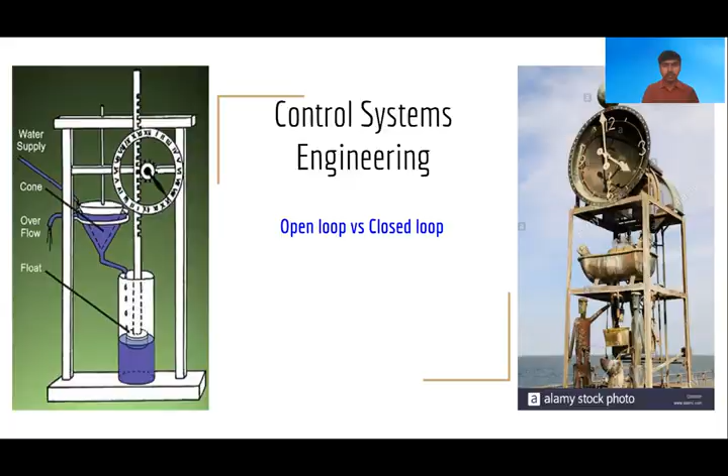In this video, we will learn the open loop and closed loop control systems with examples. Before discussing open loop and closed loop control systems, let us know what is meant by a system and what is meant by control system, and also what is the need of control system.

Now we'll see first what is a system. Generally, the system is a collection of elements or components contained in a sequence to perform a specific task. If the output quantity of the system can be controlled by varying the input quantity, then the system is said to be a control system. Then why is this control action required for the system?

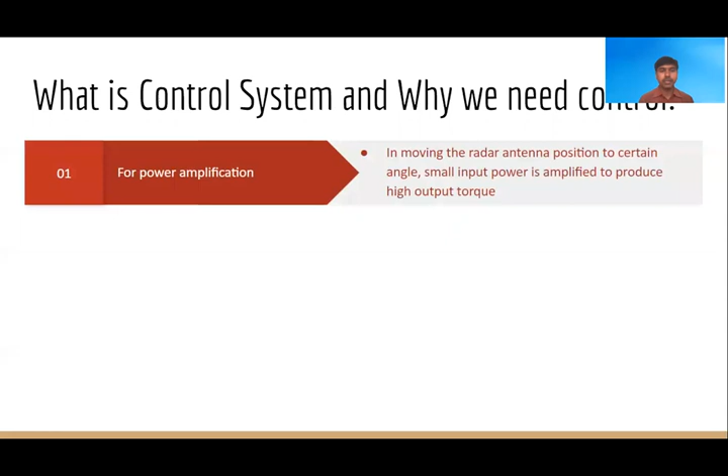Now we'll discuss different areas where control action is required. For power amplification, in some systems like radar antenna, to maintain its position, we need to give the amplified power to produce high torque on the radar to achieve the desired position.

In remote controls, to control the movements of the robot, to work in contaminated areas where human beings are not allowed, we need to control the movements of the robot.

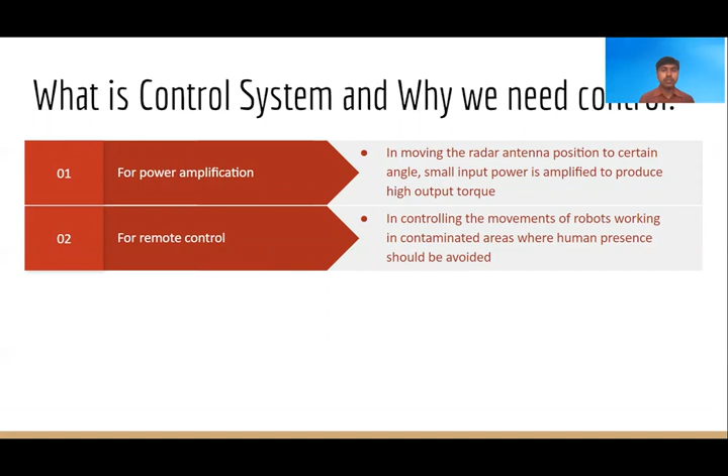Then for convenience of the input form, in the temperature control system, to maintain the desired temperature of the room, we need to control the knob position.

For compensation purpose, when the disturbance occurs in the system, we need to compensate the disturbance to achieve the desired output quantity. For example, in the antenna position, when it is disturbed with high or strong wind, we need to compensate this disturbance by varying the input quantity or some parameters to maintain the desired antenna position.

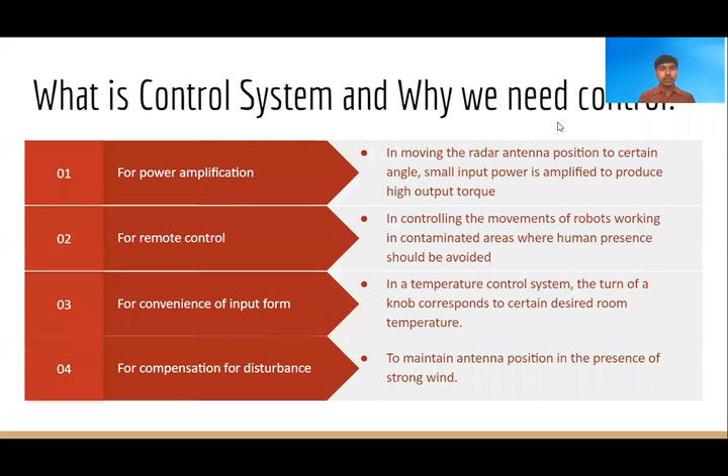Now let us see the open loop control system model. This is the open loop control system model.

Basically, the open loop control system consists of a controller and process plant, where the reference input is given to the controller. Based on the reference input, it gives the control signal to the process, then the process will deliver a controlled output. But here the controller doesn't bother about what the output is delivered by the process. That means irrespective of the output, whether it is our desired output or not, the control system will continuously deliver the same output. This is called the open loop control system.

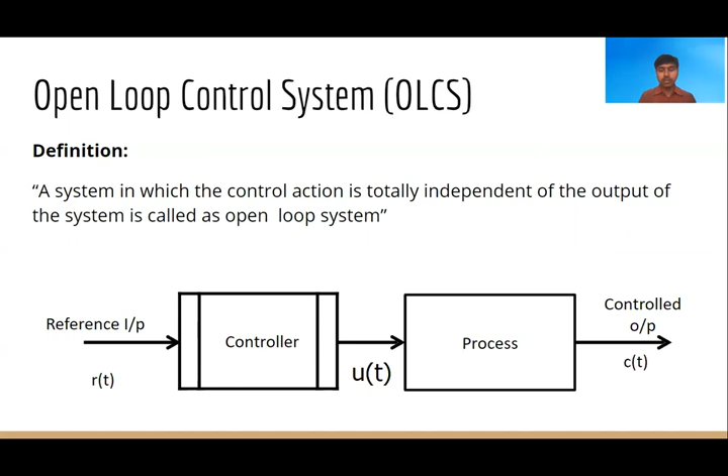Now we'll see some examples of open loop control system. See, what is this example? It's a hand dryer, electric hand dryer.

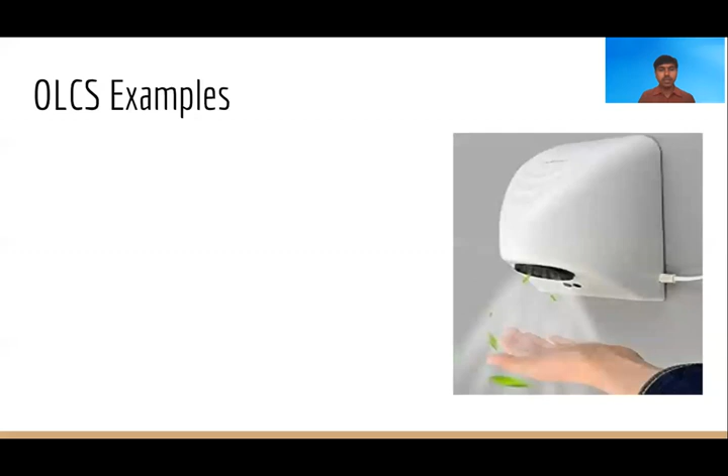When you keep your hand under the hand dryer machine, internally the air will be heated and blown out continuously, and hot air comes out to the hand and hands will be dried. As long as your hand is under the machine, whether your hand is dried or not, the hot air will come out from the dryer machine. That means the system doesn't bother about whether your hand is dried or not. This is an example of open loop control system.

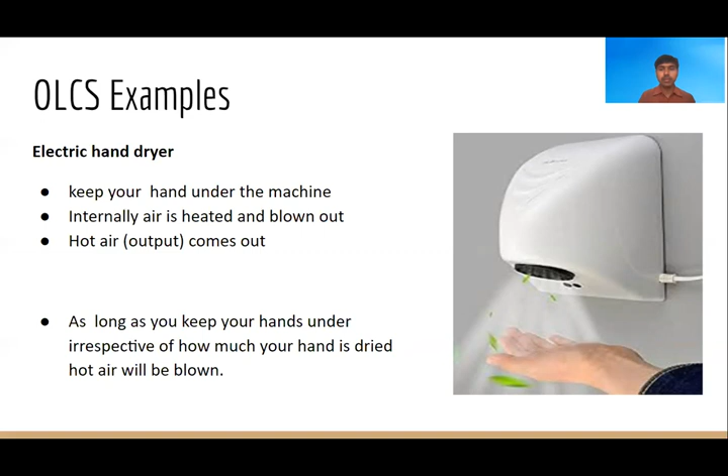The second example is automatic washing machine, where the clothes will be washed based on your time set in the washing machine. When the power is on and the time is set, the motor runs and spins the clothes inside. As long as the timer is running, the wash will be spinned, and after the time is 0, the clothes will come out.

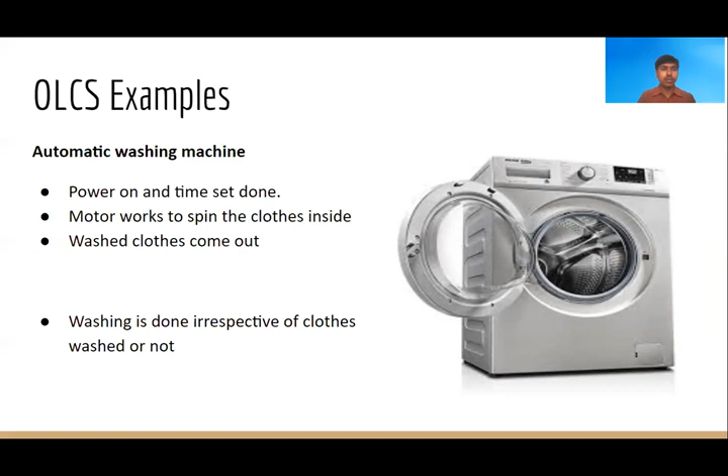Here the washing machine doesn't bother about whether the clothes are washed or not. It depends on the timing value. If we set the time, until that time becomes 0, the clothes will be spinned, and after 0 it will come out. This is another example of open loop control system.

Now see, this is another example of open loop control system. Can you guess what is this example? Yes, this is a traffic light control system where we'll set the timer in the controller for how long the lights will be on.

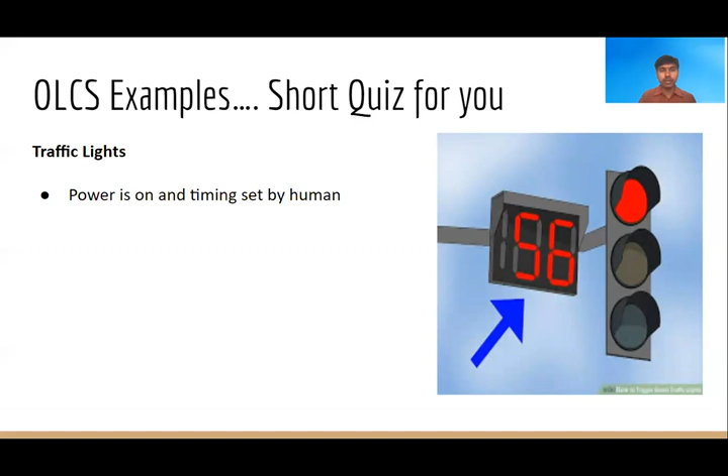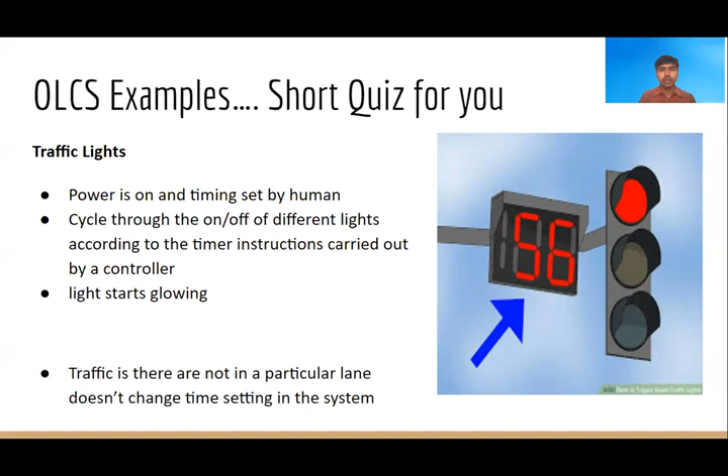When the power is on, based on the time set, the lights will be on, and it doesn't bother about whether the traffic is there or not. This is called the open loop control system.

Now we'll see what are the advantages and disadvantages of open loop control system. These are the advantages of open loop control system. The construction of the open loop system is very simple because there is no feedback, no continuous monitoring of the output variable. It is having a simple transducer, controller, and plant so that we will get a controlled output. It may be a desired output or not - don't bother. Simply the construction is very simple in open loop control system.

Due to less number of components and there being no control action on the output variable, it is economical and also very easy to maintain. This is all due to the absence of feedback, so there is no need to continuously monitor the output variable. Therefore, the maintenance also is very easy. Once the input is given, the controller gives some excitation to the plant that gives some output. So it's very easy to maintain.

The system is generally stable because here the reference input is given to the plant through the controller, giving some output, and this output is not fed back and continuously changing. So the output is always the same, producing a stable output. It is very convenient to use where the output is difficult to measure, and where the output need not be monitored continuously, open loop control system is preferred. Then what are the disadvantages of these systems?

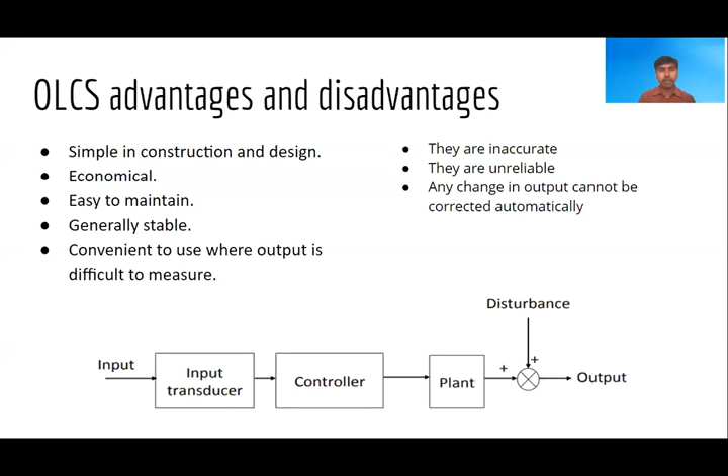To avoid or overcome these problems in the open loop control system, let us know what the closed loop control system is, which overcomes the disadvantages of the open loop system. It doesn't mean that the closed loop system is always better than the open loop system; there are some disadvantages of the closed loop system compared to the open loop system. So these two systems have their own advantages and disadvantages.

But in general, in applications we expect a more accurate output, even under disturbances, so we prefer the closed loop control system.

This is the model of the closed loop control system. In this system, we generally have the transducer at the input section, the controller, the plant, and then the output. This output is fed back through the feedback element, which is again a transducer. Therefore, the controller controls the plant parameters to get our desired output.

Here, when the input is given, the transducer converts the input from physical form to a suitable form for the controller to take action on the plant. The controller, depending on the error signal, generates a control signal to the plant, and the plant produces some output along with the disturbance present at the plant.

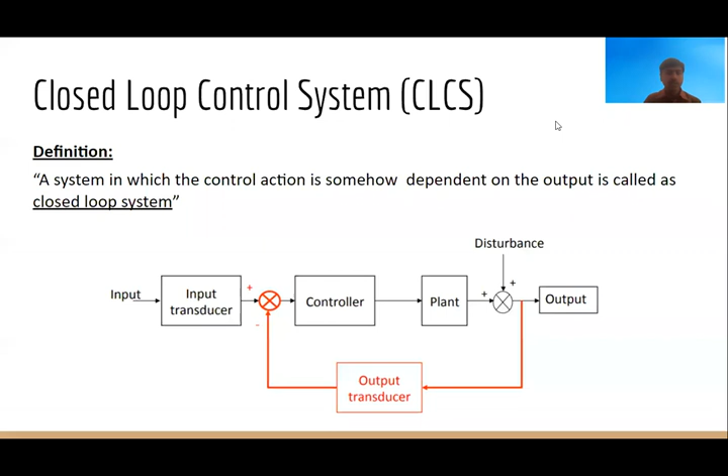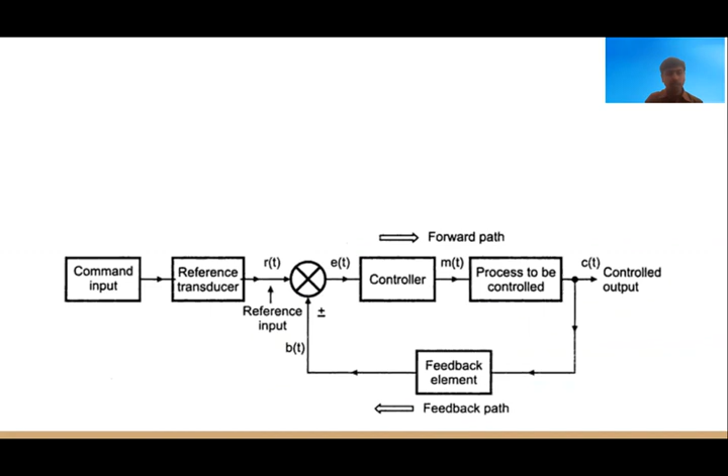This is the general block diagram of the closed loop control system. Now let us see the control signals of each block. Here the reference input is given to the error detector, denoted as R of t. After the error detector, we get the error signal E of t, which is given to the controller. Based on the error signal, the controller generates a manipulated or controlling signal to the process.

There, the process controls the parameters of the plant and delivers the controlled output C of t. This C of t is again fed back through the feedback element; say the feedback signal is B of t, and this is given to the error detector to get the error signal.

Here, the feedback may be positive or negative feedback. If it is negative feedback, the error signal E of t equals R of t minus B of t, and if the feedback is positive, the error signal is R of t plus B of t. Based on this error signal, the controller keeps controlling the parameters of the process and delivers the output until it reaches our desired value.

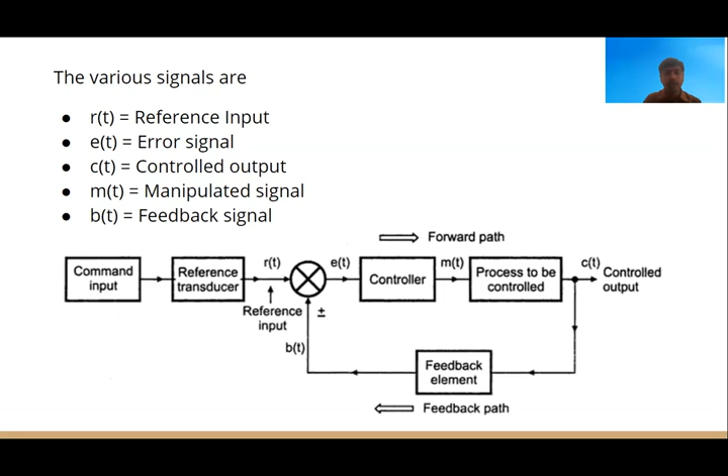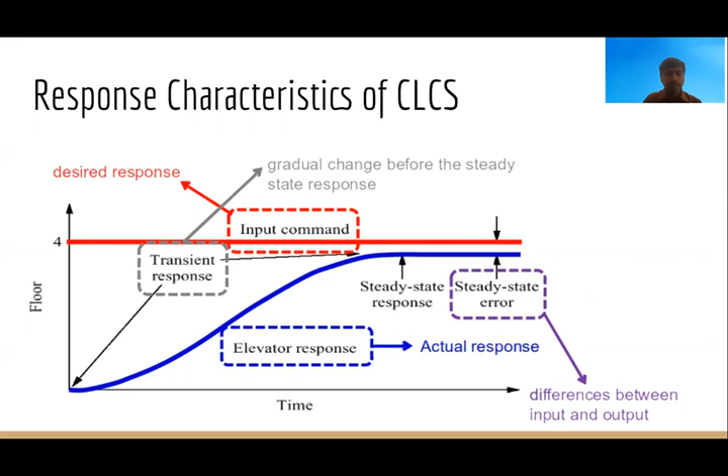In general, the dynamic response of the second order system is given like this. The output variable fluctuates till some point called the transient period. After that, it will reach and stay at some limit close to the desired value. That period is called the steady state period.

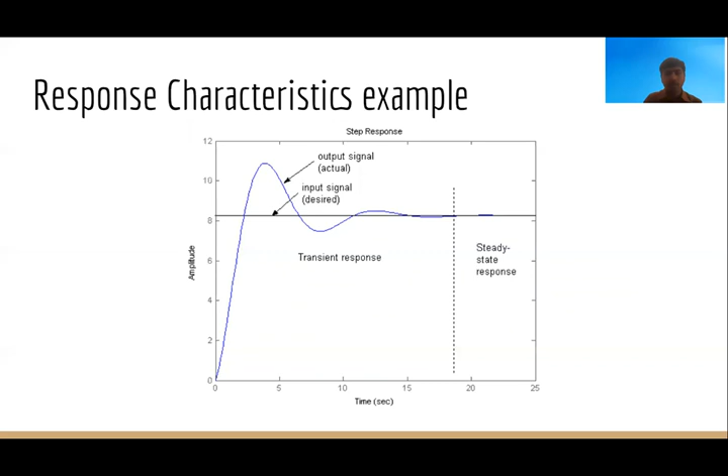Now we'll see some examples of closed loop control system. The first one is the student and teacher learning process.

In this process, the lecture content is given to the students before starting the lecture, and the teacher teaches the lesson. The student listens to the lesson and grasps the content. Finally, after completing the course, he will get a degree and placement. But the quality of the degree and getting placement depends on the performance of the student.

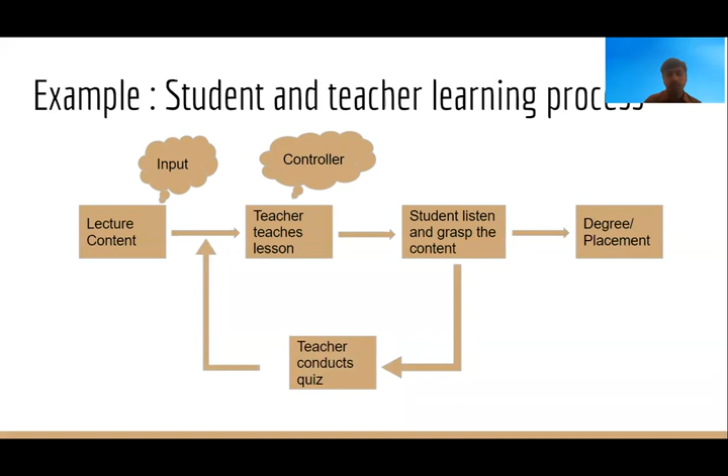The performance of the student is periodically monitored by the teacher by conducting quizzes. Here, the lecture content is the input, and the teacher is the controller who controls the teaching methodology to make sure the student's performance improves. The student listening, grasping the content, and improving performance is the process. Getting the degree or placement is the output, and the teacher conducting quizzes is the feedback based on the expected level of marks and placement.

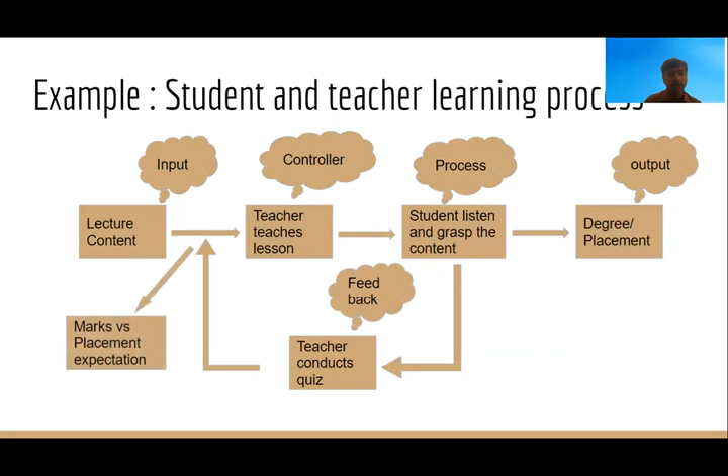In the second example, I will show two images. Please identify and compare them. On the left side we have the old iron box, and on the right side we have the new iron box. In the old iron box, we have to manually adjust the coal to get our desired temperature, and also manually check whether the clothes are dried or not.

In the new iron box, we have to manually adjust the knob to our desired temperature point, but there's no need to check whether the clothes are dried or not. Automatically, the sensor senses the temperature and switches off whenever the temperature exceeds the limit.

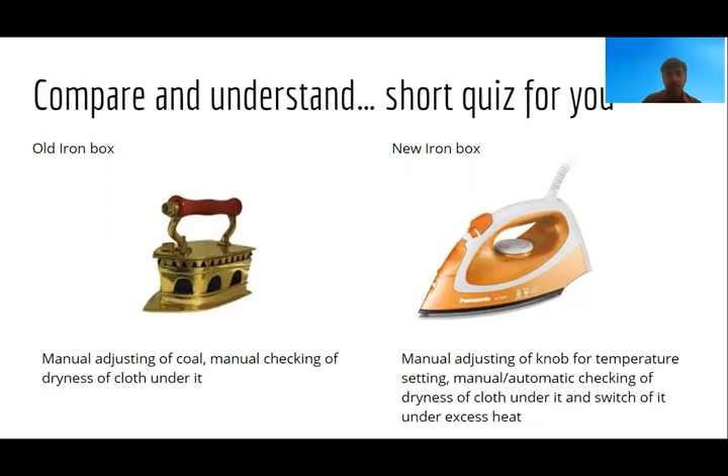Now we'll see the next example of closed loop control system, that is stability control of a quadcopter. First let's see this video, then I will explain how it is controlled.

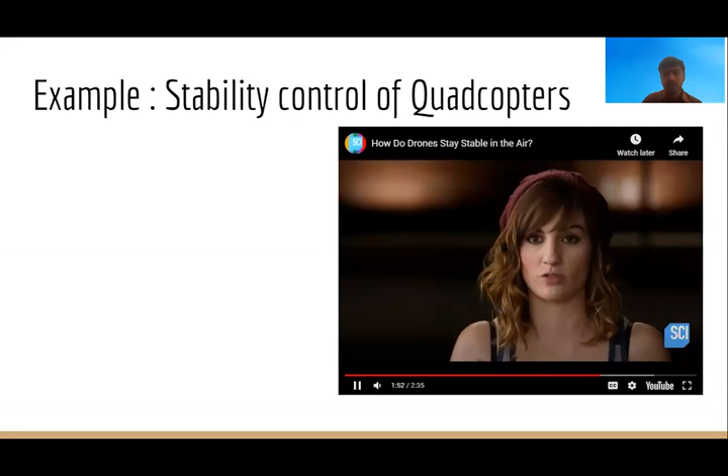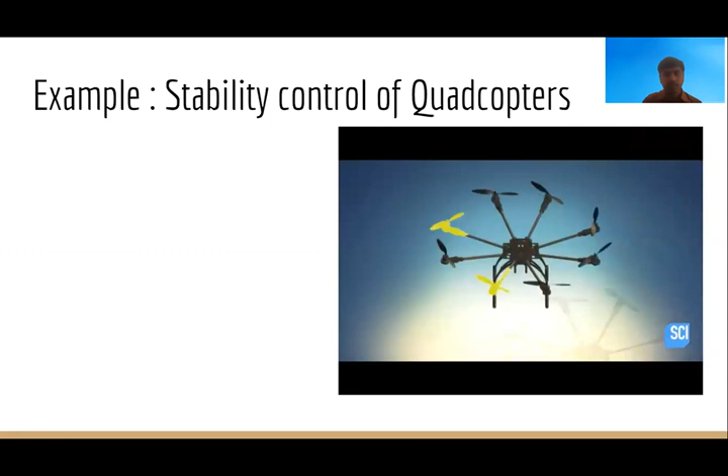Drones have incredibly sensitive flight controllers that can help compensate for things they may encounter. Say a gust of wind blows too hard on the right side, it'll compensate and keep it steady. Say one of the propellers goes out, it can compensate and still keep it in the air. You can also plan a flight path so it literally follows your instructions, using GPS to figure out where to go. You can have a drone literally follow you like a pet.

From the video, we can understand that we have to stabilize the quadcopter's altitude level. First, we set our desired altitude level for the quadcopter and send it to the controller. Then the controller makes sure the quadcopter achieves its desired altitude level. But when there is a disturbance like a strong wind, the altitude level of the quadcopter may change.

That output is fed back to the controller, then the controller controls the parameters of the quadcopter to achieve the desired altitude level and maintain it. That is nothing but stability control of the quadcopter.

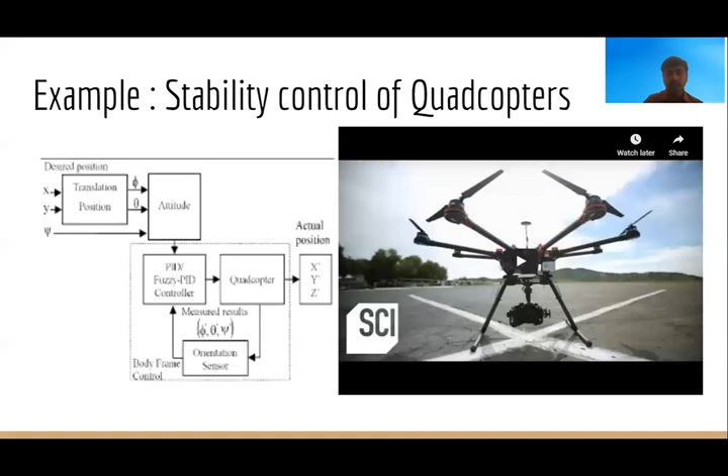The next example of closed loop control system is the autonomous car. Autonomous car means driving a car without a driver. To drive without a driver, we need to give all the information of the driving route to the autonomous car through different sensors. So the control system inside it continuously monitors the position or driving route and controls its motor to drive in the desired route.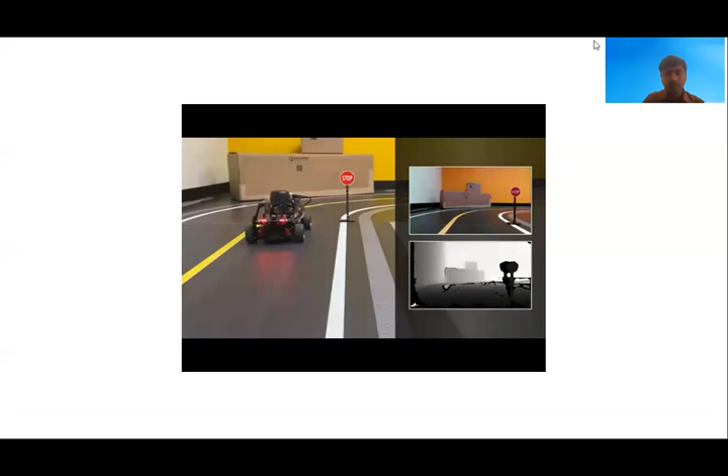Till now we have seen some examples of closed loop control systems. Now let us move on to the advantages and disadvantages of closed loop control systems. In a closed loop control system, even in the presence of nonlinear components, the output is accurate. Because of feedback, we try to reduce the error signal, so the output is more accurate even in the presence of nonlinearity.

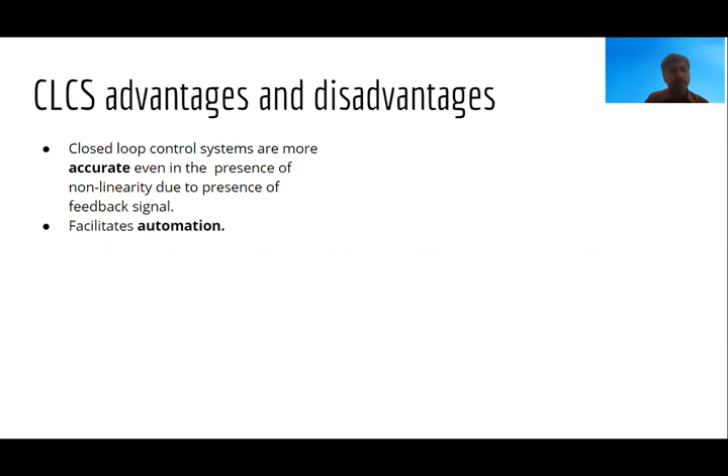The second advantage is it facilitates automation. Due to the feedback, it automatically corrects the signal to our desired level. The sensitivity of the system may be made small to make the system more stable, since due to feedback, the sensitivity of the system is improved, therefore achieving more stability.

This system is less affected by noise. Because of the feedback, we always measure the output under disturbance and correct it by continuously taking the feedback, which reduces the noise effect on the output. Therefore, the effect of noise is less.

Now we'll see the disadvantages of the closed loop control system. Due to the presence of feedback and extra components used, it is costlier and more complicated to design. This complicated design is due to the feedback and continuous monitoring of the output to achieve the desired level, and it requires more maintenance due to this continuous monitoring.

Feedback leads to oscillatory response. Due to the feedback system, the output variable will not suddenly reach the desired level; it will oscillate and slowly reach the steady state.

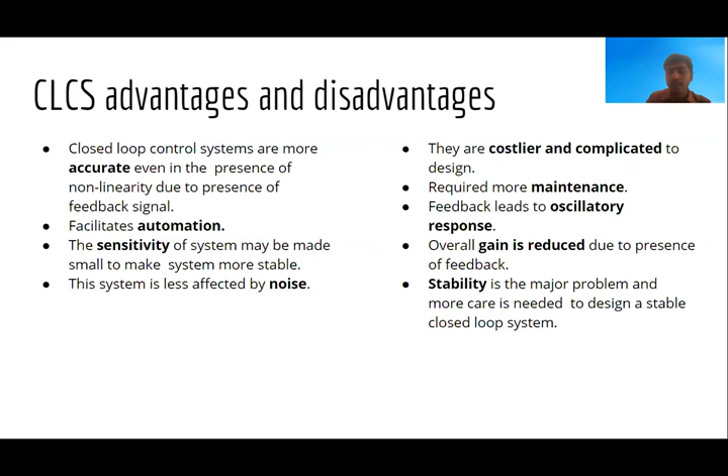Now we'll compare the open loop and closed loop control systems. In the open loop control system, the feedback does not exist, and in closed loop system, feedback exists.

Therefore, changes in the output reflect at the input in closed loop system. In open loop system, due to the absence of feedback, if there is any change in the output, that doesn't affect the input.

In open loop system, output measurement is not required for the operation of the system, since there is no feedback, there is no need of output measurement. Whereas in the closed loop control system, output measurement is required to feed that output to the controller back to take the necessary action.

In open loop system, feedback element is absent, and in the closed loop system, feedback element is present. In the open loop system, error detector is absent because there is no feedback. And in the closed loop system, error detector is necessary because the feedback signal is compared with the reference signal to generate the error signal.

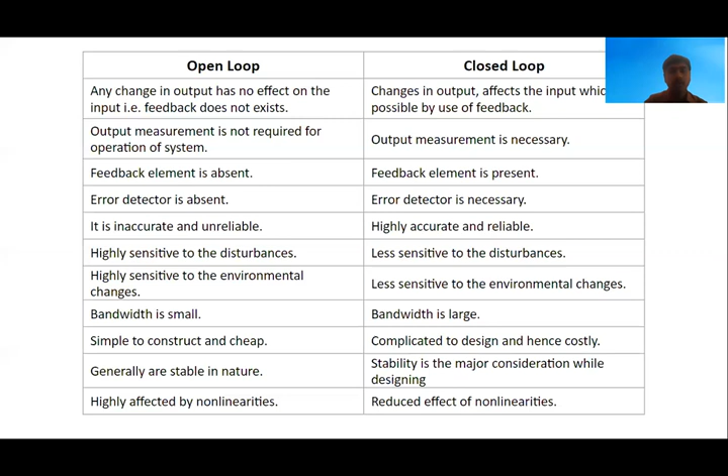These are the differences between open loop and closed loop control systems.

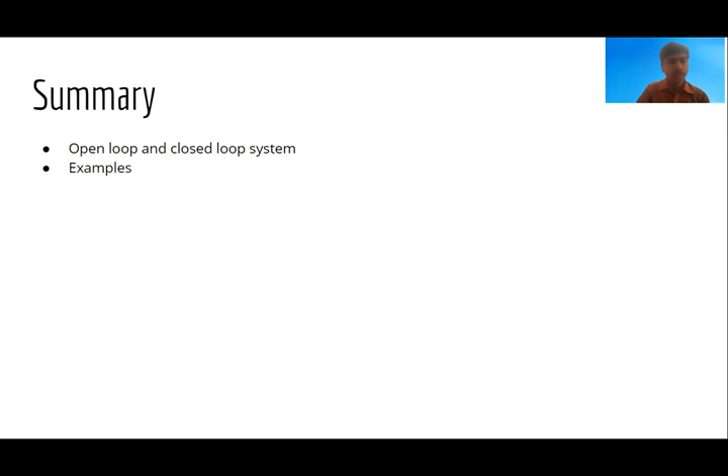Before ending the session, let me recall what we have learned in this video. We have learned the classification of control systems, that is open loop and closed loop systems, with examples for both. We have also learned the advantages and disadvantages of open loop and closed loop systems, and finally, we have compared these two systems to know the differences.

In the next video, we will learn about the block diagram representation of a given control system and the block diagram reduction using block diagram algebra. Thank you.